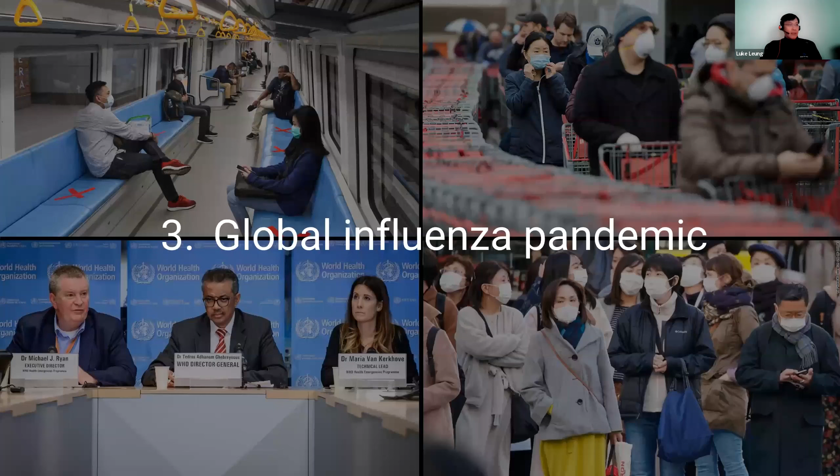So we are still in the middle of it, isn't it? Kind of the pandemic. So this is 2019, United Nations World Health Organization mentioned the top 10 things that can derail human society in the future. Pandemic, number 3. So what is worse than pandemic? Chronic diseases, non-communicable diseases, and number 1, climate change. So those are the top 3 things that's going to impact our health that can potentially derail humanity in the future.

On top of those 3 things, population. We are anticipating 2 billion people increase in the next 30 years. So by 2050, humanity will increase 25% more population. I mean, you really need to chew on that. A quarter more people on Earth. And not only that, by 2050, not like 2019, where people over 65 is only 9%, it's gonna be 16%, almost double the global population above 65 years old.

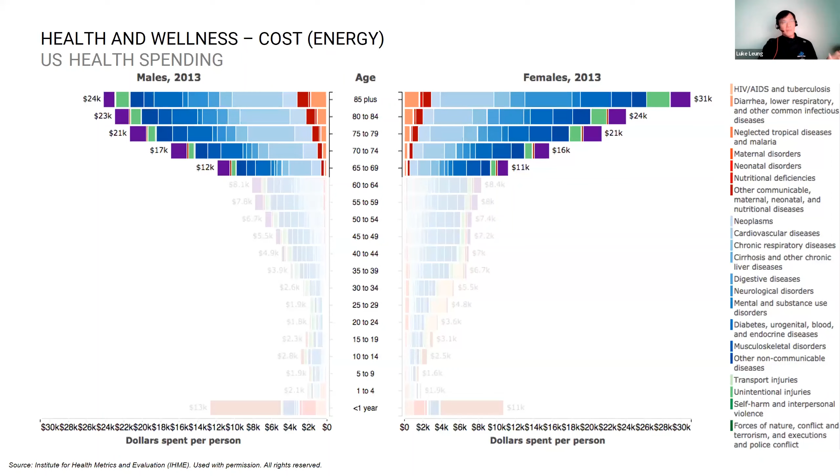Problem is when you're above 65, it just balloons the amount of healthcare costs. So you can see once you're above 65, it just mushrooms out the amount of illness you have, no matter male or female. Females on the right, male on the left. And the different shades of blue are chronic diseases, which is the second health impact that can derail humanity.

So let's march through these 3 elements for the rest of the hour to understand how we can do better. Climate change. We're going to have to move towards whole life carbon. Because by 2060, there will be 2.5 trillion more square feet of building because of the 2 billion more population. That is the entire building stock of the world. We need to double that. So there's a lot of area we're going to put in.

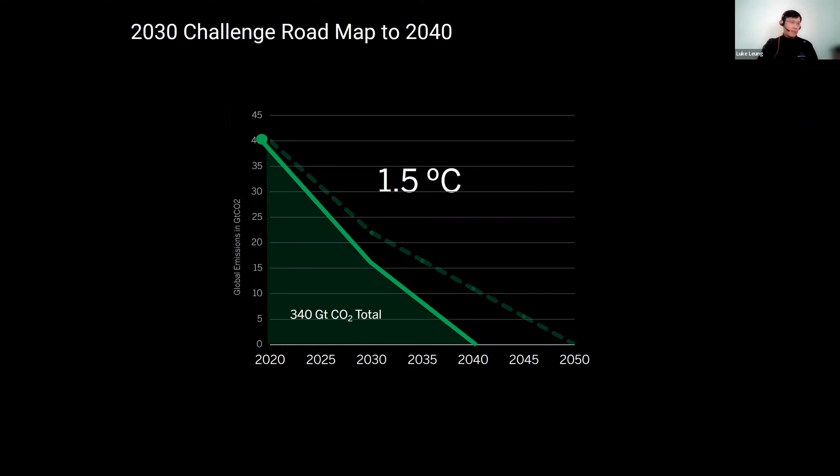And because of that, we have to maintain 1.5 degrees C by 2040, per the latest United Nations IPCC report, so the climate change doesn't get worse. And because of that amount of people, the amount of building, the carbon budget for that 1.5 degrees C is actually only 340 gigatons of CO2, not a lot.

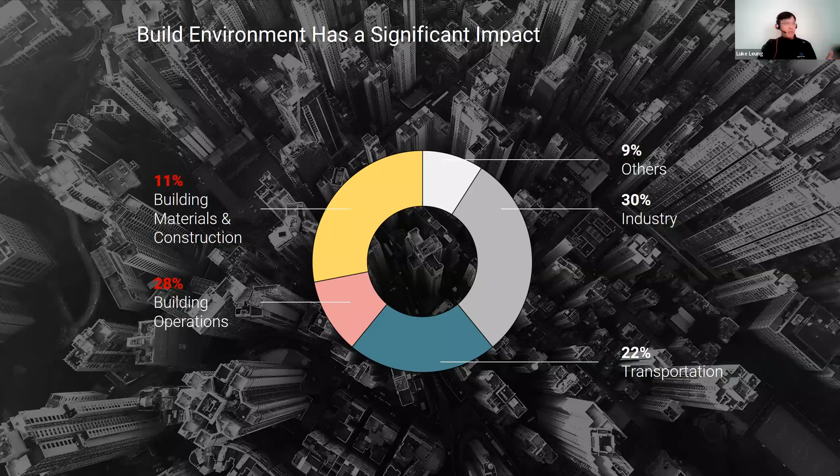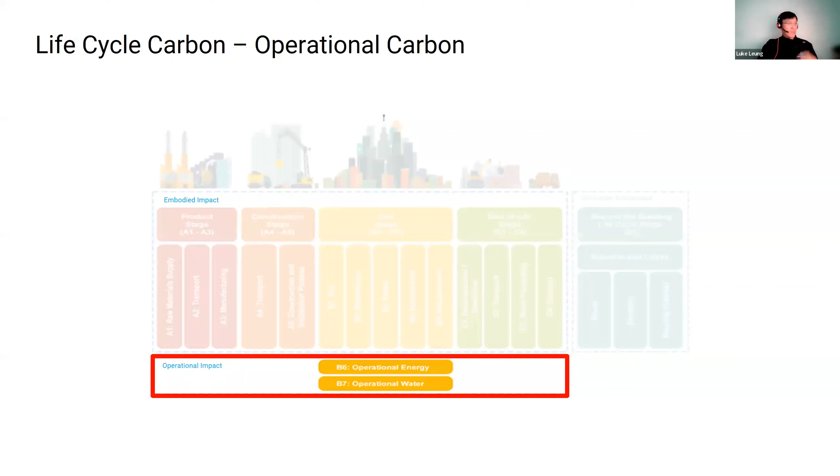And of course, by now you've probably seen it 1,000 times that buildings account for almost 40% of the carbon emission. Significant of them is in operation, about 11% in embodied. We know much better how to do operational carbon. Now, by the way, this is the framework of EN 15978. If you are not familiar with it, you probably should be, because a lot of organizations are already using this framework. And the operational carbon is really at B6 and B7 at the bottom part, the B6 and B7 categories.

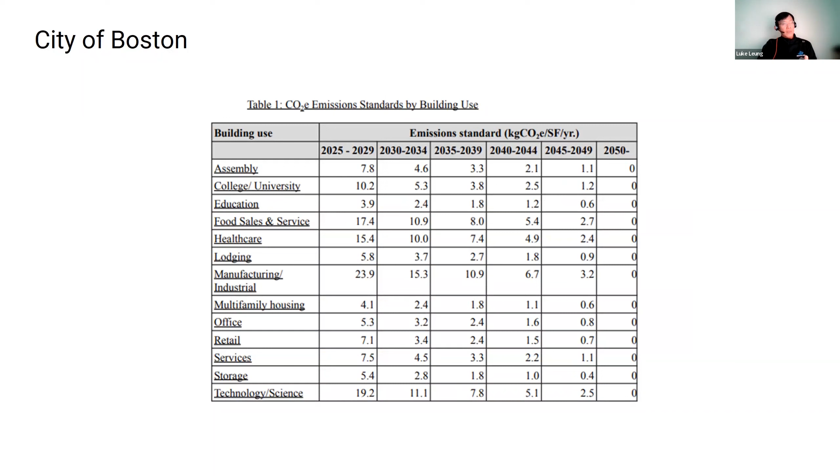We're going to see a lot more cities move forward, like City of Boston. They actually have not energy, but carbon emission standards for different types of building from now till 2050, which will be net zero. So I think we're going to see more of that. In the City of Chicago task force on building decarbonization, we actually have discussed information like that, of how to achieve a net zero future.

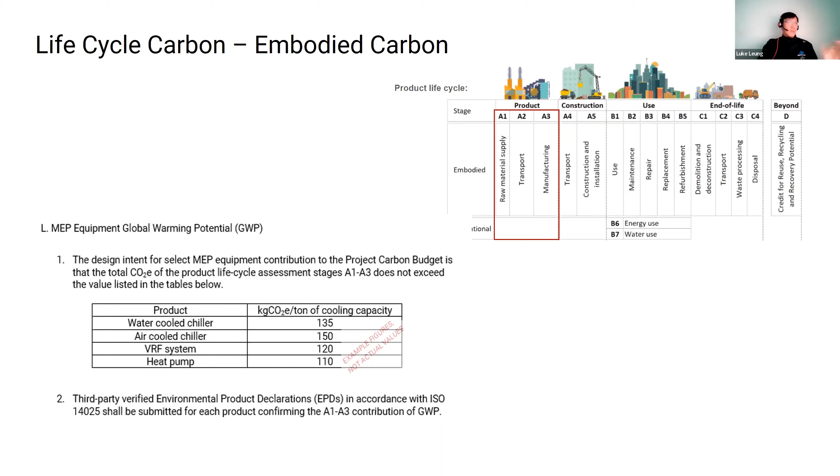And you probably heard a lot of discussion about A1 to A3, which is cradle to the gate of the factory building. There are many specifications that people start using that start asking for that information or specify the amount of carbon you can embody in those equipment, less in MEP, more so in structure, in architecture. So those are the product A1 to A3, the upfront carbon category.

And then A4 to A5, the transportation carbon to the site. That is a smaller portion, but people start also thinking about that. But more importantly is the in-use carbon. Now, why is the in-use carbon important? Because in this embodied carbon, it talks about the leakage of refrigerant, which has gotten a lot more attention because they're moving in several states.

They're moving to GWP of 750 or below. So in some states you cannot even use R410A or R134A. You have to use R32 or R513A, lower than GWP of 750, once you go over a certain amount of volume in the building. So that limits potentially what type of HVAC equipment you can use, because not all refrigerants can be used in all kinds of HVAC equipment.

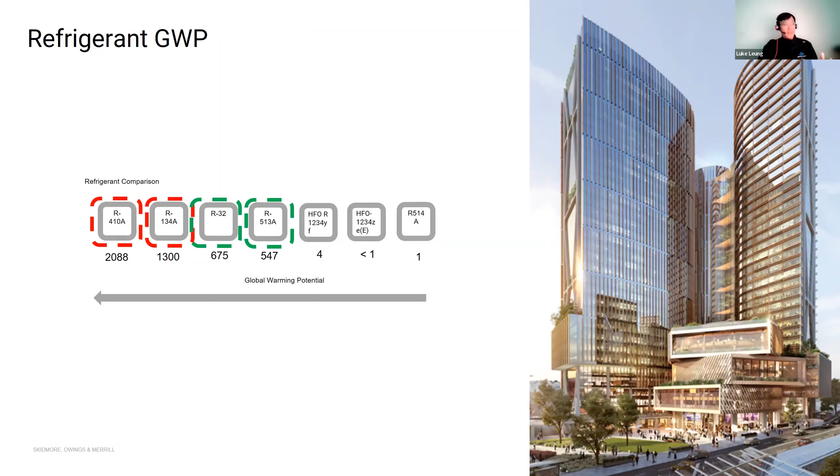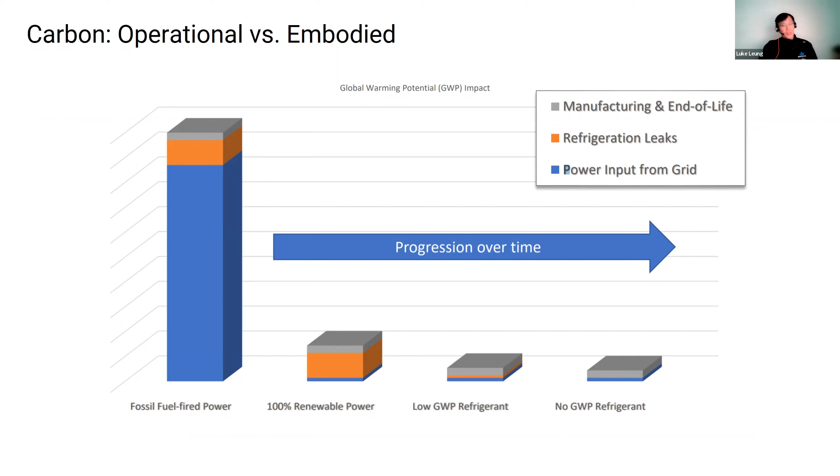In fact, as we go forward in time for any specific HVAC equipment, right now, much of it is the blue, the operational energy. But for those who use refrigerant in the future, once you get rid of the operational energy, the refrigerant leakage can be the next most significant carbon piece inside an equipment, and then the embodied carbon, which is gray in the picture here. Finally, is the end of life, how much of that you can recycle. So that makes up the embodied carbon.

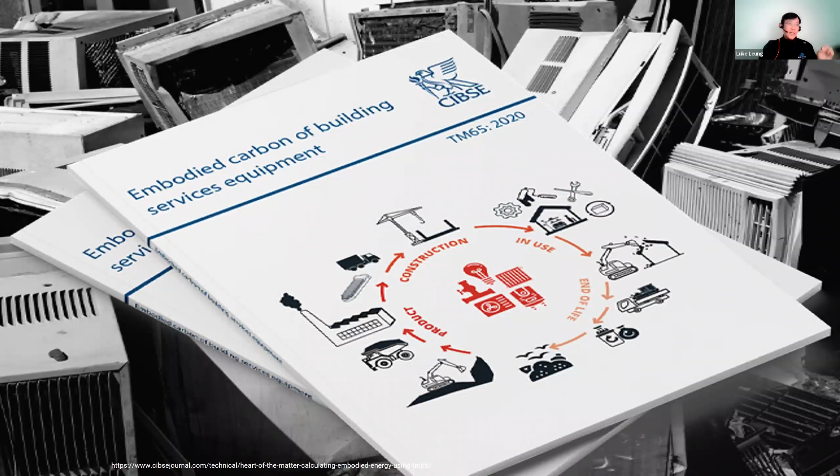Now, CIBSE people, as you know, UK already addressed this piece of embodied carbon in MEP. There's a standard in MEP embodied carbon, including refrigerant leakage as part of the embodied carbon. ASHRAE is right now thinking of using a similar standard, basically use TM65, but adopt it and make it a North America version so that the manufacturers can have a simple and less expensive way to provide embodied carbon information.

So that's life cycle carbon. So we quickly touched on carbon. So we're going to move into the next module. It's about kind of the pandemic. What is in the air?

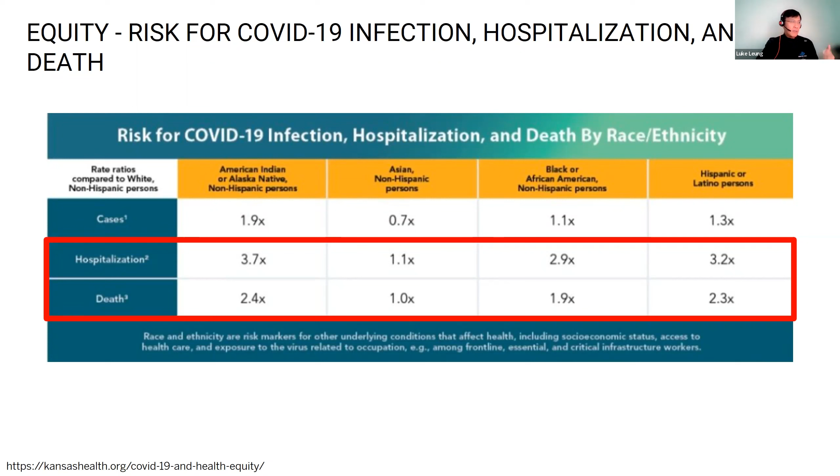So when we look at the pandemic, we see a whole bunch of things. We see not only the pandemic, but also it reflects the equity issue of much more hospitalization and death if you are minorities, right? Almost 4 times hospitalization, and death is almost about 2.5 times more if you are American Indian and other non-Hispanic minorities. And the other is not just race is an issue, but also if you are in senior living or school, you tend to have more outbreaks, especially senior living, which we'll touch on more later. A lot of outbreaks in there.

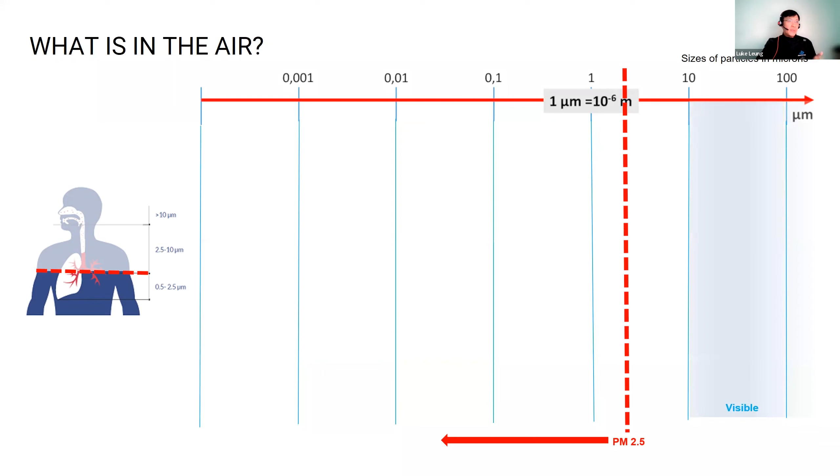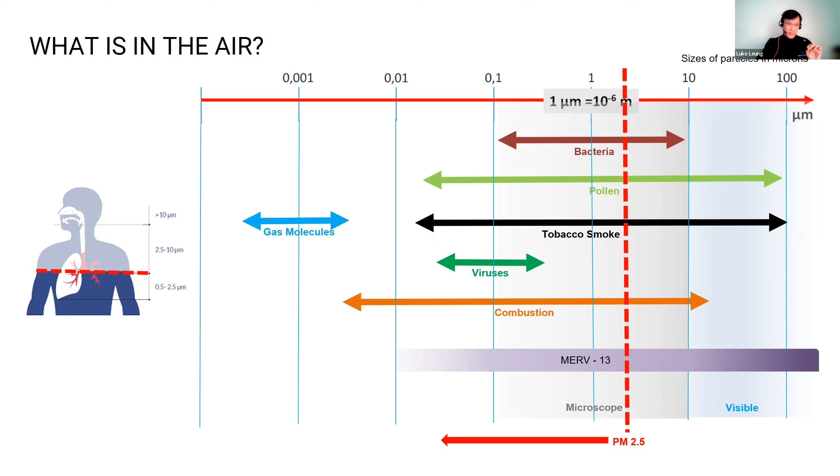So moving forward, in order to have a healthier world, we've got to start looking at the PM 2.5. And then those are the visible, those are the non-visible elements. But the good thing here is no matter if it's fire, pollen, bacteria, viruses, combustion material, a MERV-13 filter can take care of a lot of those, except if it's a gas, right? You have to use a carbon filter. So moving forward, ASHRAE and many organizations around the world are now thinking of using MERV-13 or equivalent to provide the necessary indoor air quality.

So one thing we can do is maybe we will spend more time outside, because when you are outside, your chance of breathing in any contaminants is about 1,000 times less compared to indoor. So this is 330 North Green. They're actually this space that can open to outside to create this half climate space.

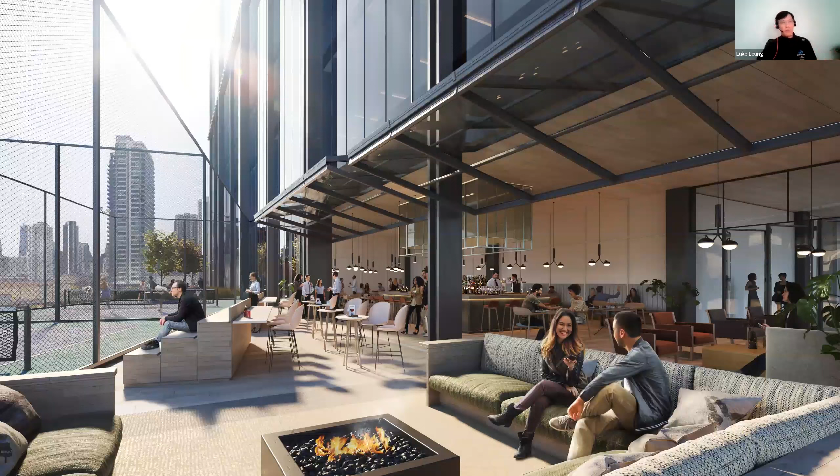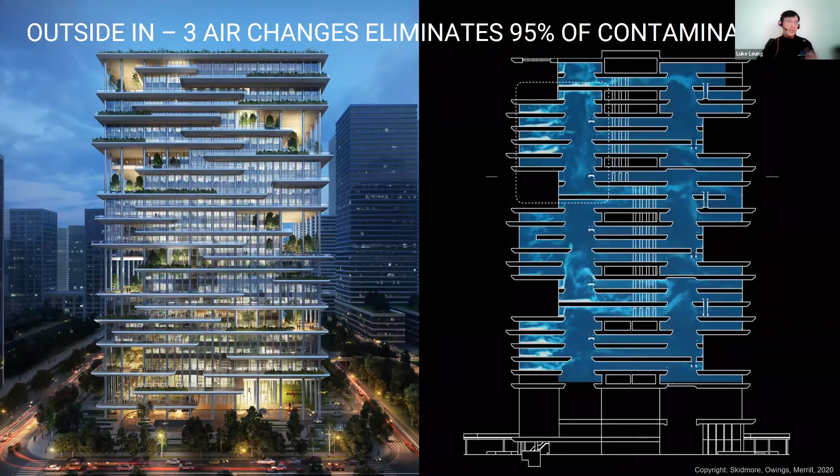ASHRAE is right now drafting an emerging issue brief on dynamic thermal environment. How do you design for this sort of half climate space? What are the issues to think about? Because when you open your window, or if you provide circulated indoor air, if you have three air changes, you can eliminate 95% of the contaminant inside the space. So provide clean air. Now, clean air doesn't have to come from outside, but it could be from the outside or from the inside. It can eliminate 95% of the contaminants.

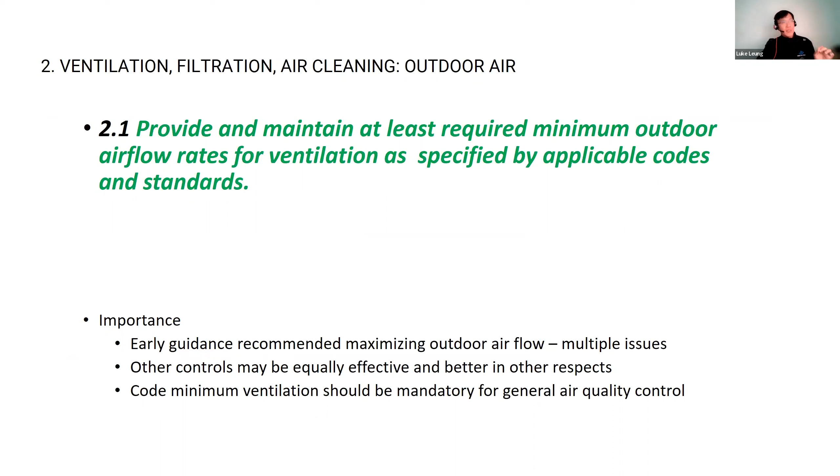But what about the times you cannot spend outside, in locations that are open to the outside? So the indoor environment is addressed in the pandemic by the core recommendations. Some of you are familiar with it. We'll quickly go over that. The first is to provide minimal outdoor air. You are not required to provide more outdoor air than minimum for pandemic purpose. So one of the reasons is because of this.

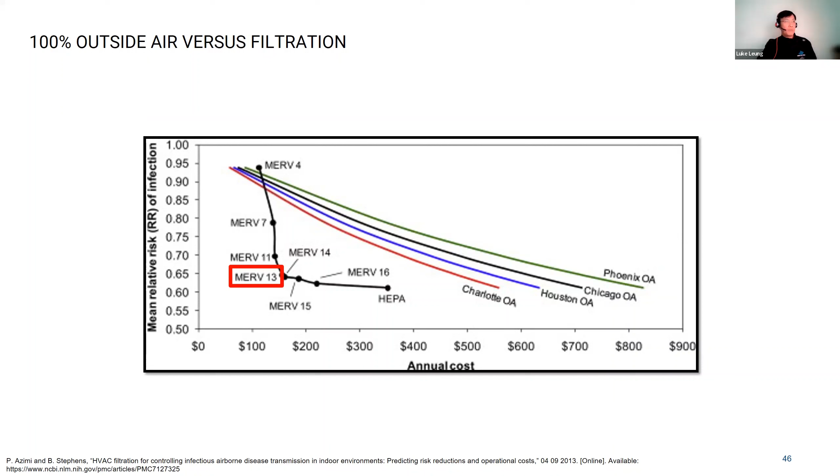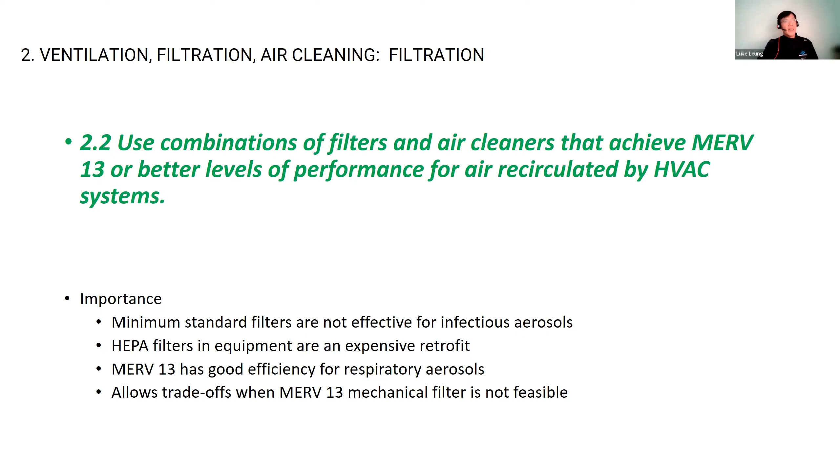Because if you have MERV-13, you turn the corner, 100% outside air only can eliminate just a little bit more risk, but you are paying a lot more if you are in Chicago, as you can see on the screen. So MERV-13 is a very good place to be. And the other thing to think about is a combination of MERV-13 filter or air cleaner or UV light. So the idea is MERV-13 filter at the AHU, portable air cleaners, or UV light. These three elements basically combine together to provide this MERV-13 or better level of performance.

Now, MERV-13 filter, a lot of people say, oh, it's going to cost you a lot more to run it, but you probably saw the ASHRAE Journal last year in about July or August. It actually talked about, compared to MERV-5, MERV-13 does not necessarily increase the amount of pressure drop. But you got to be careful, because if it's a 1-inch MERV-13 filter, oftentimes it's pre-charged with electricity. So it may be more efficient initially. As time goes by, the charge kind of drops, and then the efficiency will drop too. So the 1-inch MERV-13 filter, you just have to be mindful of that.

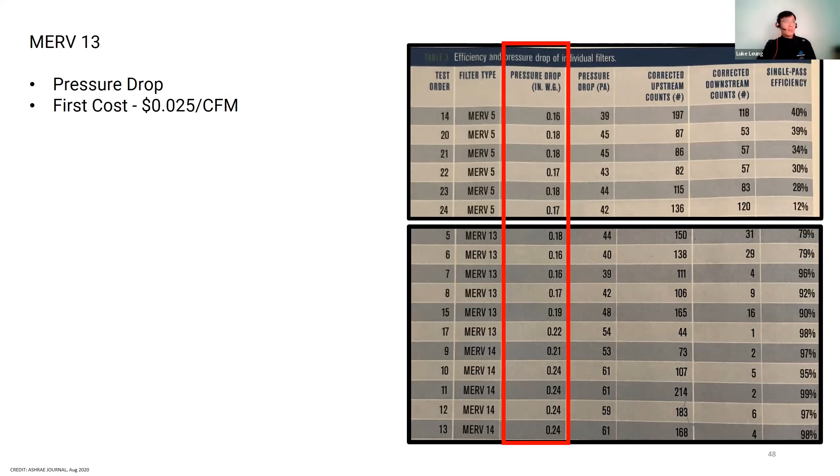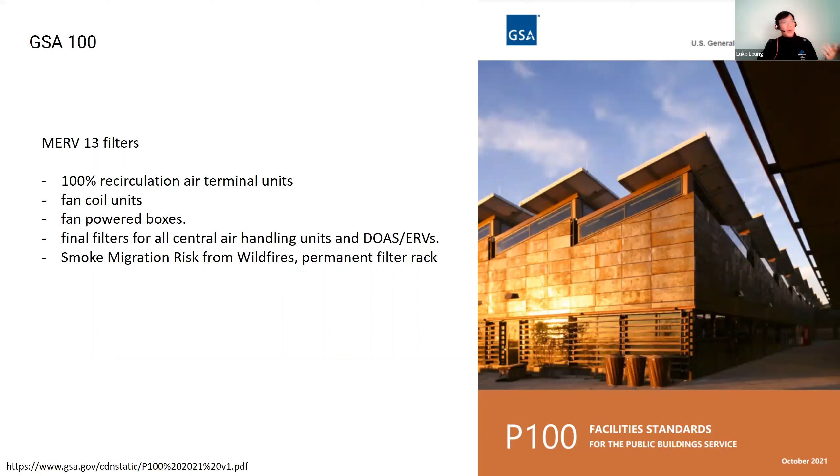Well, who's doing that? If you work with GSA P100, the latest edition already recommends MERV-13 filter in all the AHUs, different types of MERV-13 filter. It will be more like a bag filter for AHU, but more like a 1-inch filter for fan coil, and you will have to add filter to fan coil, fan powered boxes. All the recirculation elements need to have MERV-13 filter. And it's also a provision for areas like California, which will see wildfire.

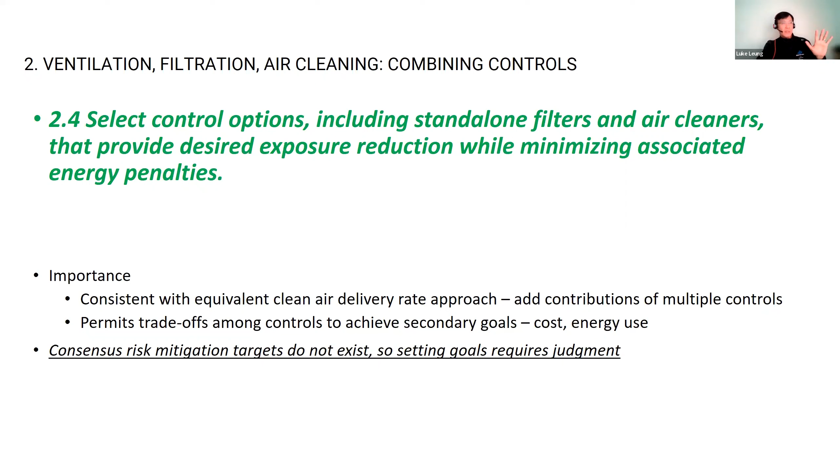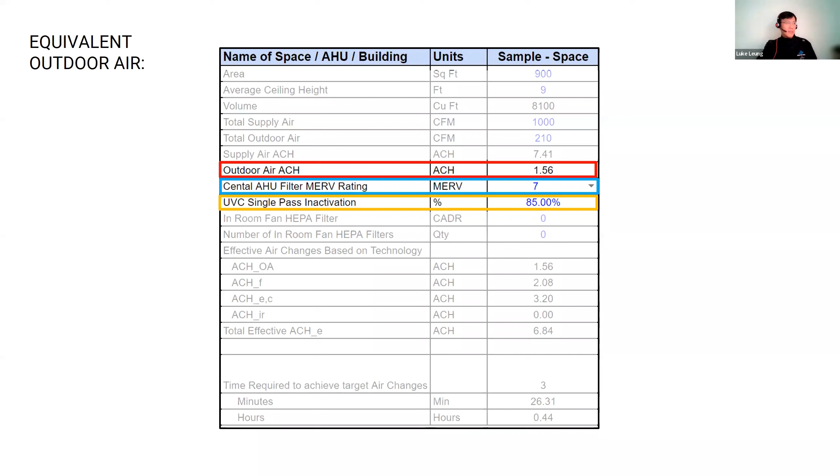Now, when you mix MERV-13, portable air cleaner, and UV light together, you can potentially have higher level of protection than just basic MERV-13, right? So depending on what your space requirement is, you can potentially add these devices in different configurations to improve your protection. You probably heard of the equivalent outdoor air approach, which allows you to add, quote unquote, equivalent outdoor air together. So if you have outdoor air, you have MERV-7, you have UVC light, these three elements, you can actually add them together. In this case, it forms about 6.84 of equivalent outdoor air. So this approach is on the ASHRAE website. You can download it and use it.

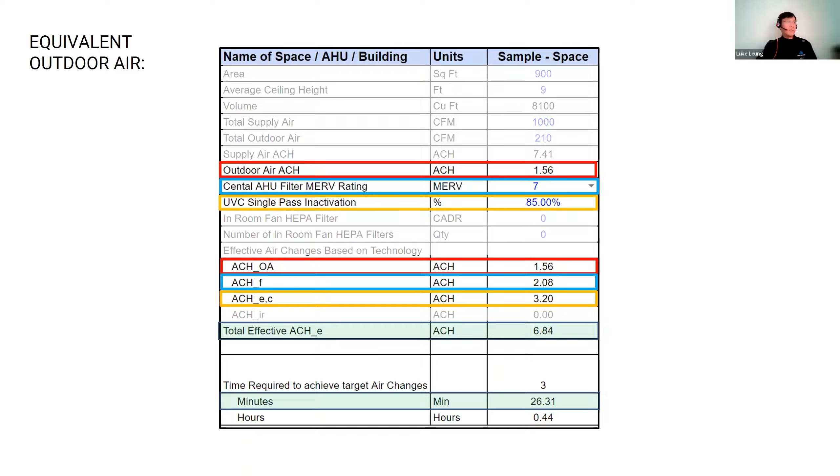Another concern we saw during COVID time is a VRF system, the cassette with no filter, right? So when you start recirculating the air with no filter, that's what happened in a Guangzhou restaurant. It ended up with a lot of people getting infected beyond the distance of 2 meters, right? This is the famous case. So moving forward, what we think will be important is if you're going to have a VRF cassette inside a space with no filter, you may want to start thinking about provision of certain air cleaners in the space that achieve that MERV-13 rating when it's required during pandemic time.

So how do we design our buildings, especially for the senior citizens who saw a huge amount of outbreaks in their senior living, as some of these buildings have VRF cassettes. So we got to start planning for how do we achieve that MERV-13 or above filtration holistically. Now, what if you have Omicron or other viruses that are much more infectious than the current one? So this is what happened.

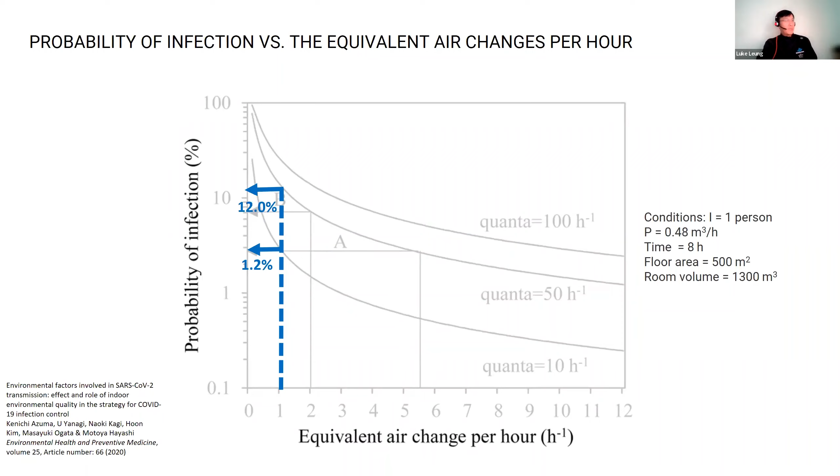Okay, so pandemic. Before we move forward, the key there is provide a MERV 13 filter or equivalent or more, depending on the risk of the space, right? So chronic diseases, what's happening to the human race?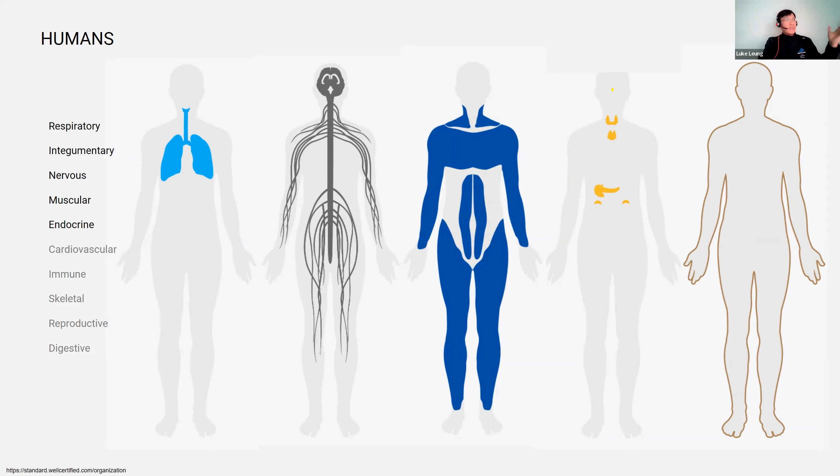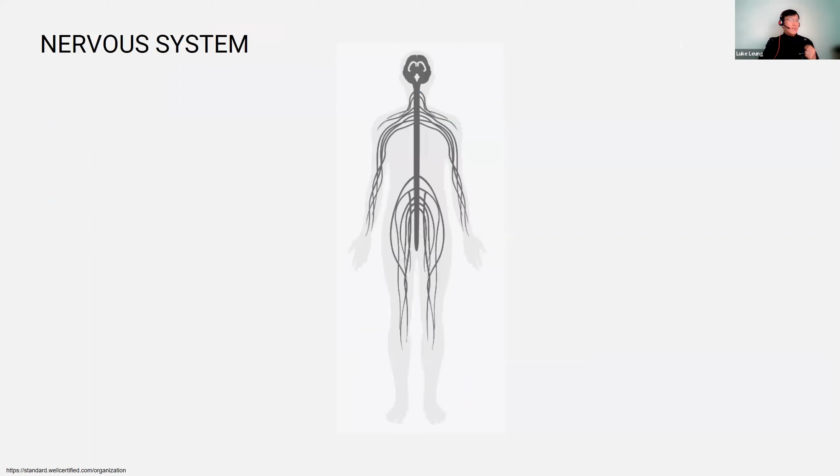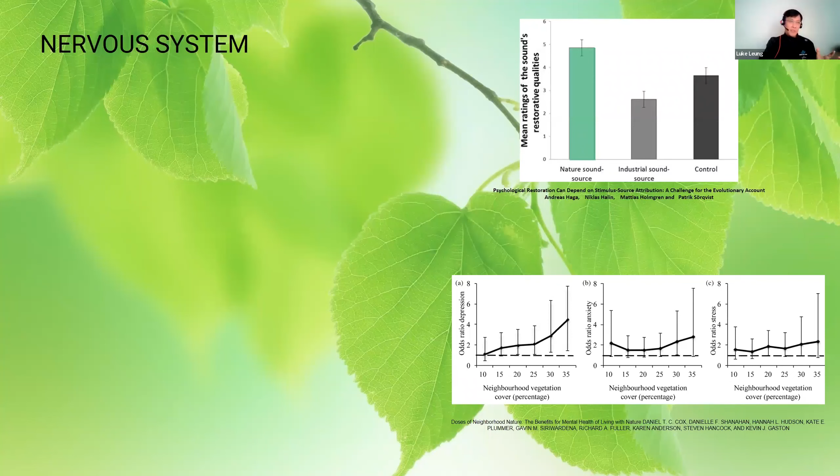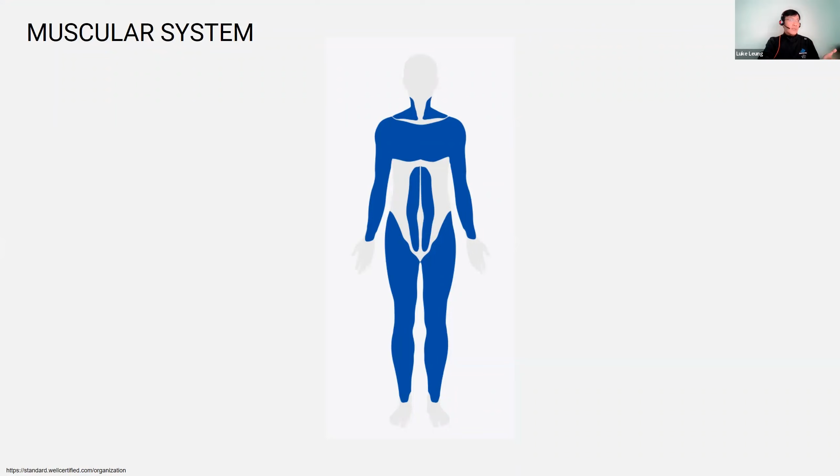But there's also the muscular system, as in we need to walk 7,000 steps a day. We see design towards more expressing of the stairwell and use of the stairwell in buildings.

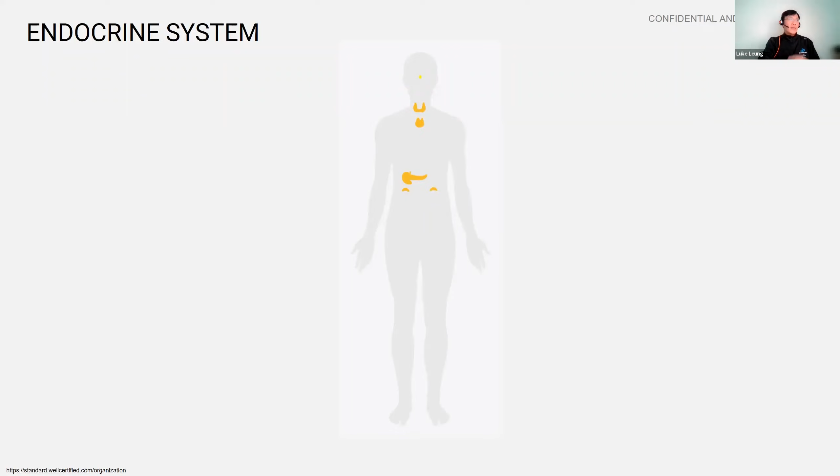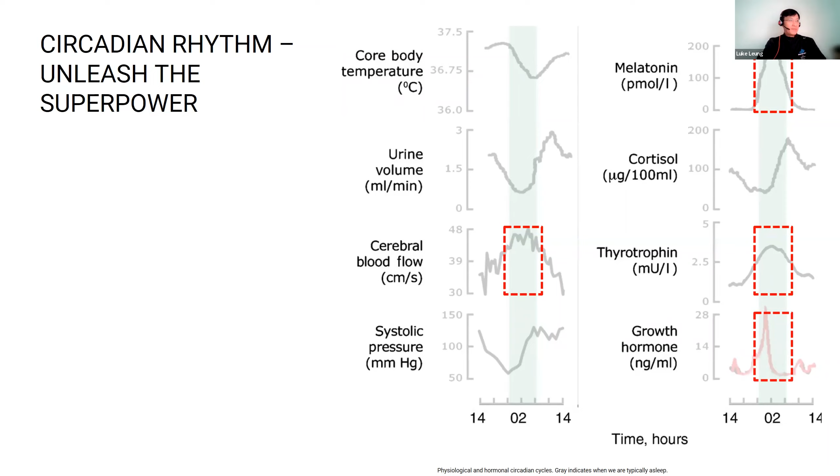And then the hormone system, addressing the circadian cycle, because there's actually more blood flow to your brain when you're sleeping than when you are awake. So oftentimes your best ideas come up when you just wake up, because plenty of blood flows to your brain when you're sleeping. So to address this circadian rhythm, we start addressing the lighting of the building in terms of not using white and blue light in the nighttime, etc.

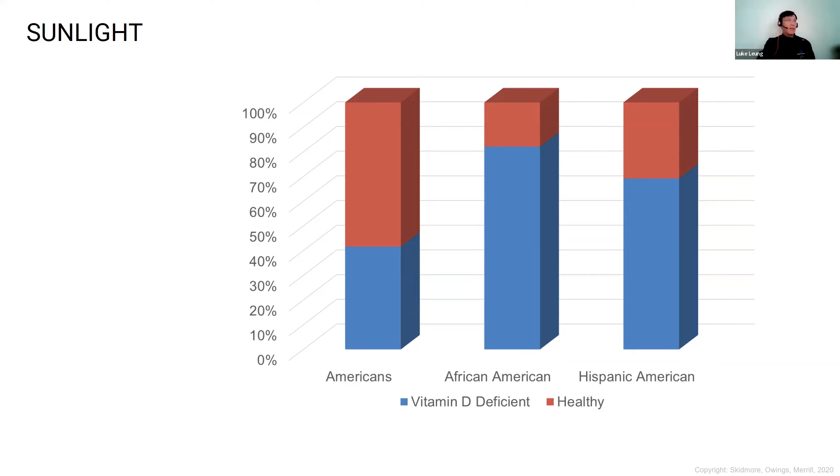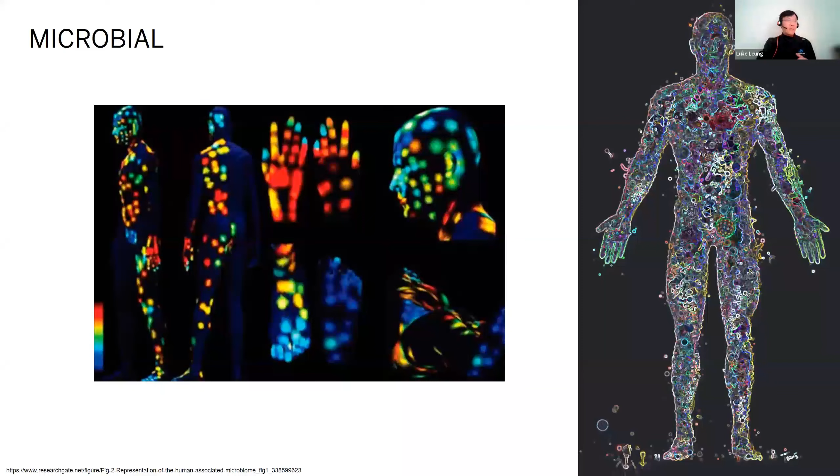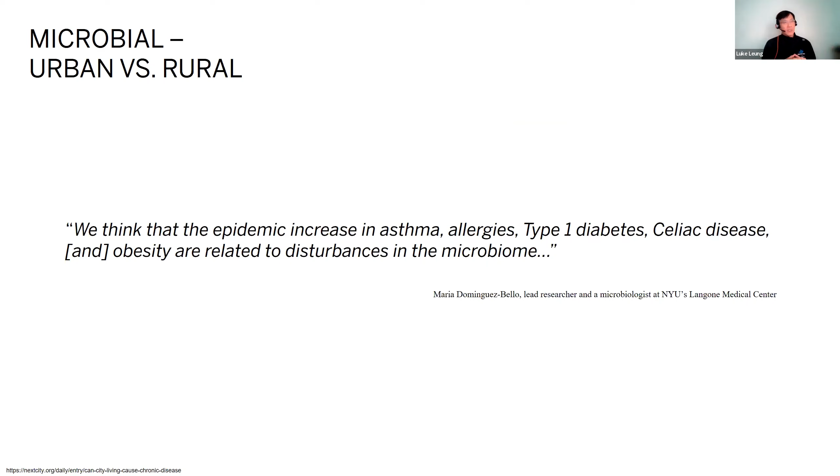Also impacting our skin is microbials. Studying rural and urban areas, New York University researchers found the microbial makeup of the urban environment is very different than the rural environment. And they came to the conclusion that part of the reason why there are so many chronic diseases in this generation is because we disturb the microbial biome in our built environment.

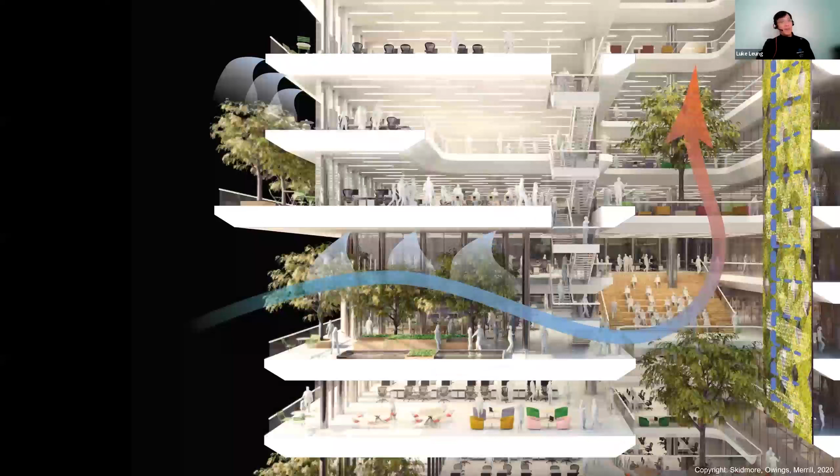Now, you've probably been seeing some discussion of probiotic air, or probiotic food, right? They hold some promise, but a lot more research needs to be done to understand what probiotic air will be healthy for everybody. In the meantime, a dose of natural ventilation may also be helpful. In this case here, we planted trees outside the building to bring a little bit of that diverse microbiome inside the building.

So finally, we addressed three things already: the climate change, pandemic, and also the chronic diseases, right? The change in human body. Finally, I want to add a little bit of that Midwest twist here.

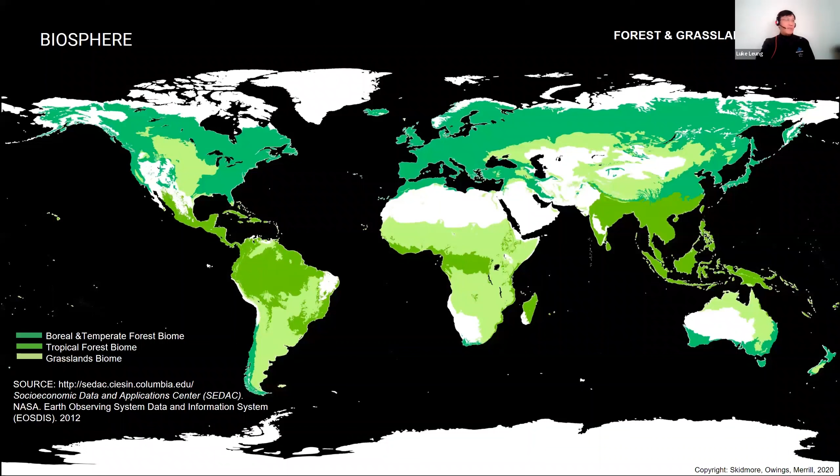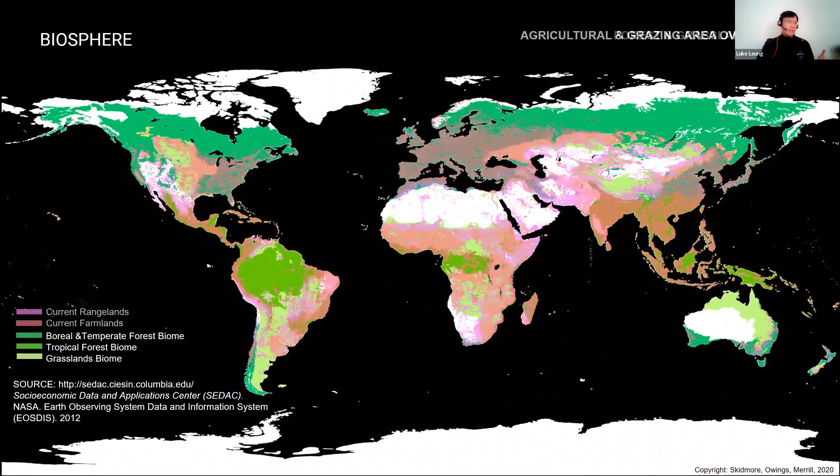When we look at the world 8,000 years BC, it looks like this. This is the world today. It's not the urban area, it's the farming area that impacts the green area. We took down a lot of the forest to create this farming area. And we are from Illinois, a lot of us are, so we know what that means.

Now, when that happened, actually the world as a whole, this is a paper done by MIT, decreased the amount of biogenic secondary organic aerosol. Basically, a lot of this microbial from plants decreased. Now remember that diversity of microbial is important, right? We actually decreased that diversity. What increases is the nitrogen oxide from the soil released into the atmosphere, and the ozone increases. So the air we breathe compared to pre-industrial revolution is probably not as healthy.

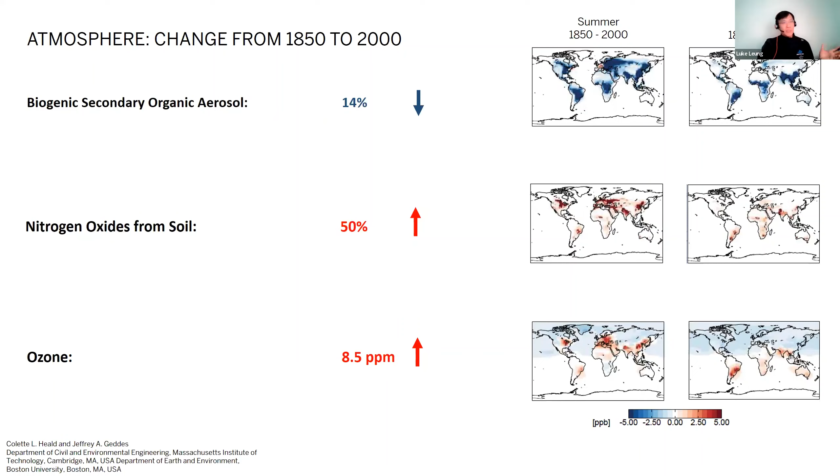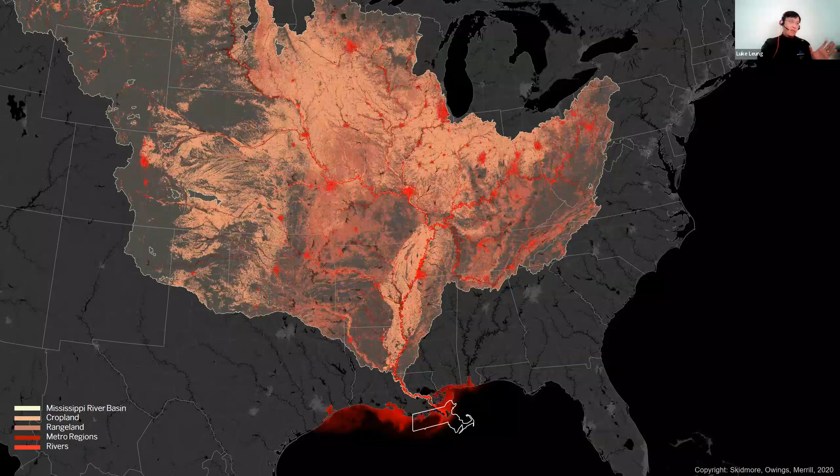And also the soil we live in, since we are in the Midwest, there's a huge amount of this runoff to the Gulf of Mexico to form the dead zone. The dead zone is, if you take one of the states in the US and put it there, it's significantly larger than that. It's the nitrogen and phosphate runoff from the farming in the Midwest area that creates this dead zone in the Gulf of Mexico.

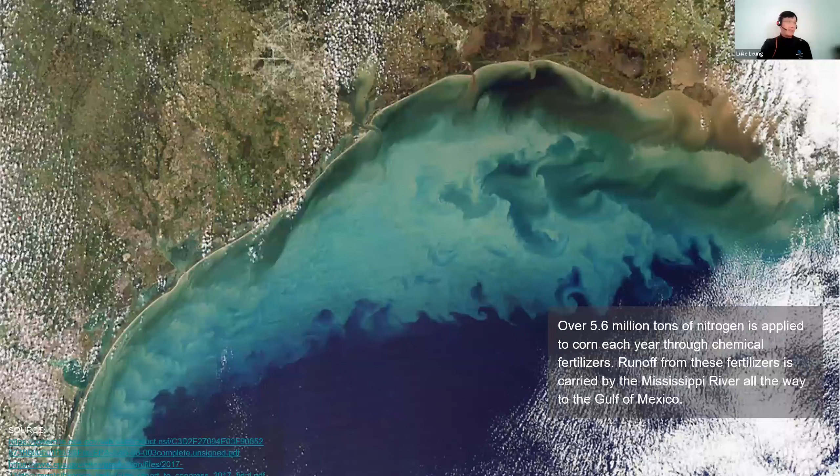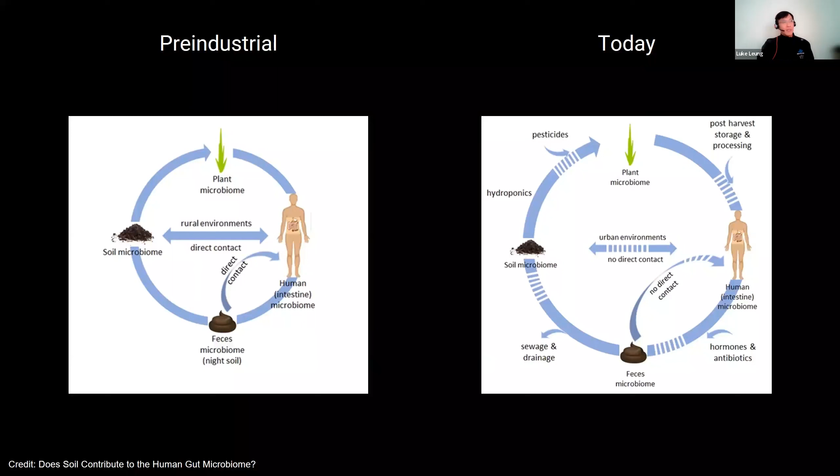That element flows into the Gulf of Mexico and also flows into our tummy. Sorry about that, I know it's lunchtime, but it's a little different than pre-industrial revolution. Pre-industrial revolution, that was a cycle, so what goes into our tummy tended to be more diverse microbes. Today, with the pesticides, with the different way we treat our waste, and the post-harvest treatment of food, etc., we broke down that microbial cycle. So it's no surprise today that inside our guts, the microbes are completely different than the pre-industrial people.

Well, how do we know the pre-industrial people? How did their gut microbes look? So what we did is we studied the Amish people to figure out how the gut microbes are different. Now maybe the haircut also helped, but other than the haircut, the Amish people are significantly healthier than typical Americans. Part of that is the gut microbe.

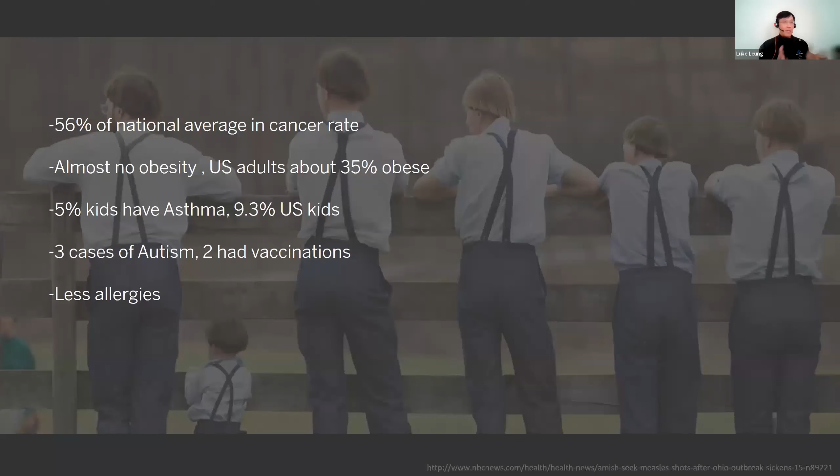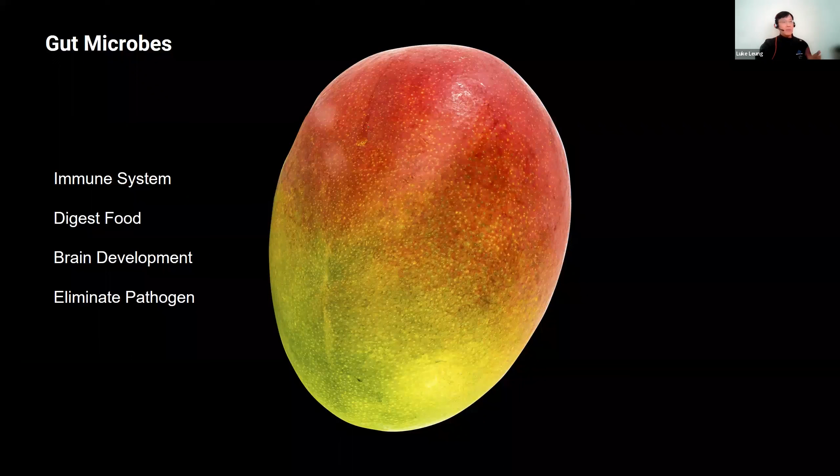How do we know that? Because the gut microbes, add all of that together, are about the size of a mango, but they also help develop your immune system, digest your food, your brain development, and eliminate pathogens inside our body. So if the gut microbe changes, you as a person also change. Just like what University of Oxford told us, the gut microbe is actually linked to your personality.

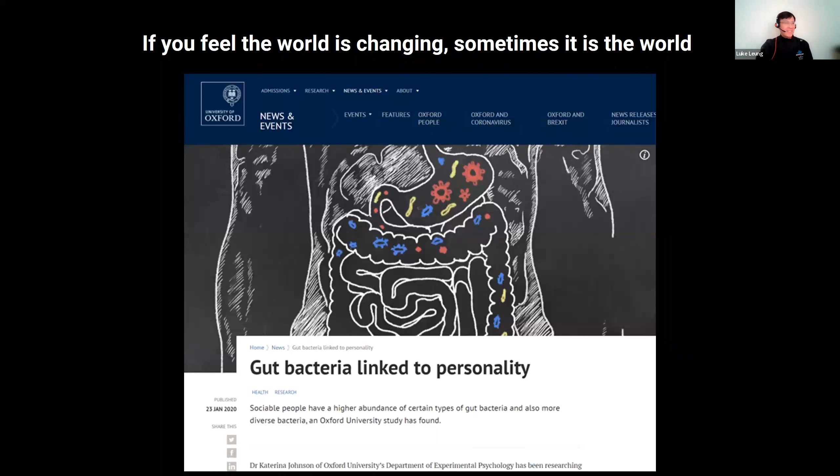So sometimes you think, oh, maybe the world is changing. Oftentimes it's maybe not the world, it's you, but other times it's actually the world. So if you think the person next to you is acting a little bit strange, you may want to ask them, what did you eat yesterday? Because this research indicates your gut microbe can potentially develop a whole bunch of chronic diseases, from asthma to cardiovascular to type 2 diabetes. It has that impact, not just the food you eat, but how the gut microbes digest the food you eat.

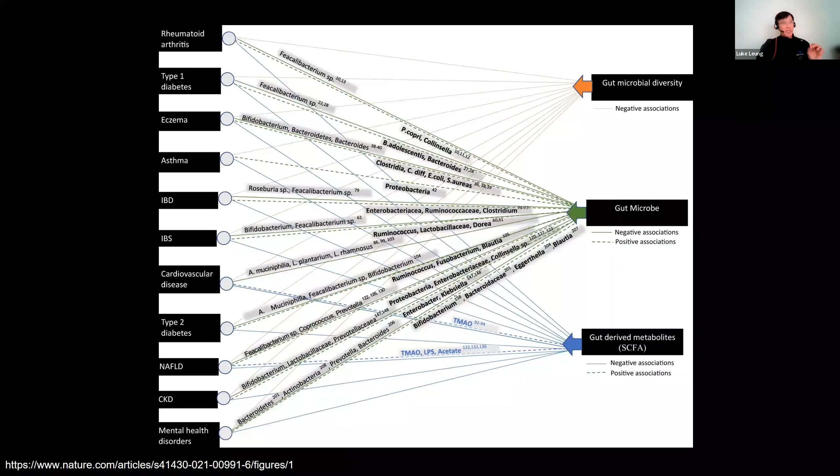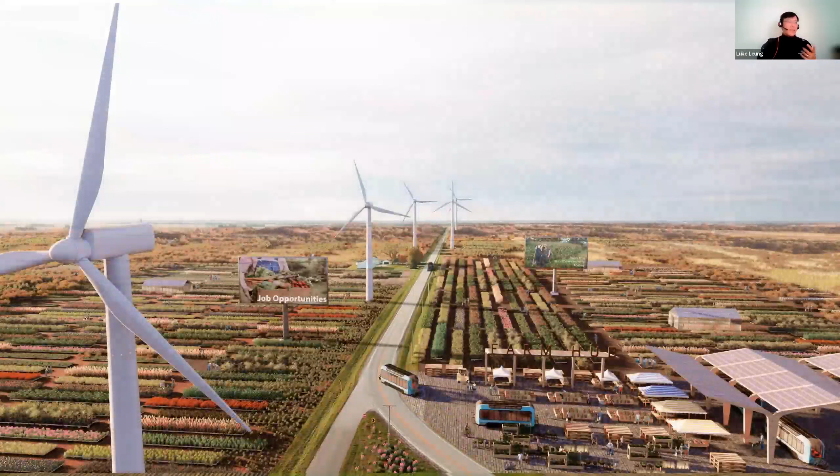So oftentimes, as we think about bio-based material, we're going to say, oh, let's try to lower the whole life carbon. Let's use bio-based material. Well, unless the bio-based material comes from regenerative farms, it can potentially do more damage and release more carbon than other materials.

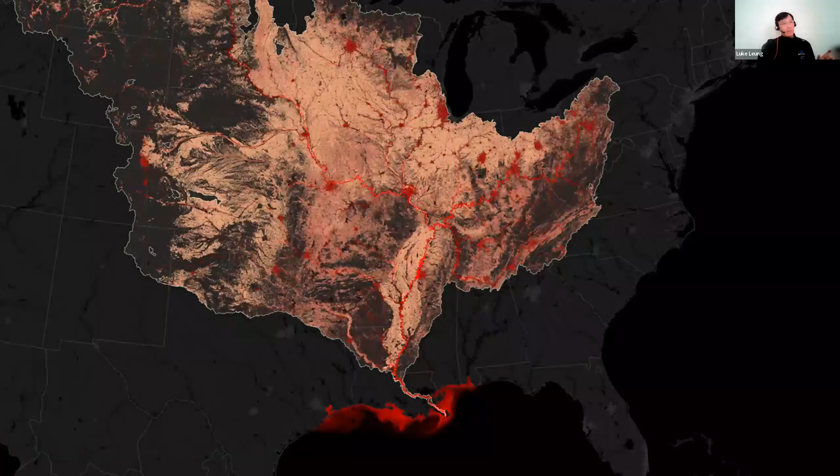So we have to be really careful when we start specifying bio-based material, especially since we are from the Midwest. If we can specify and start thinking about regenerative farms, we can potentially change the runoff to the Gulf of Mexico to no runoff, make the environment healthier and people healthier.

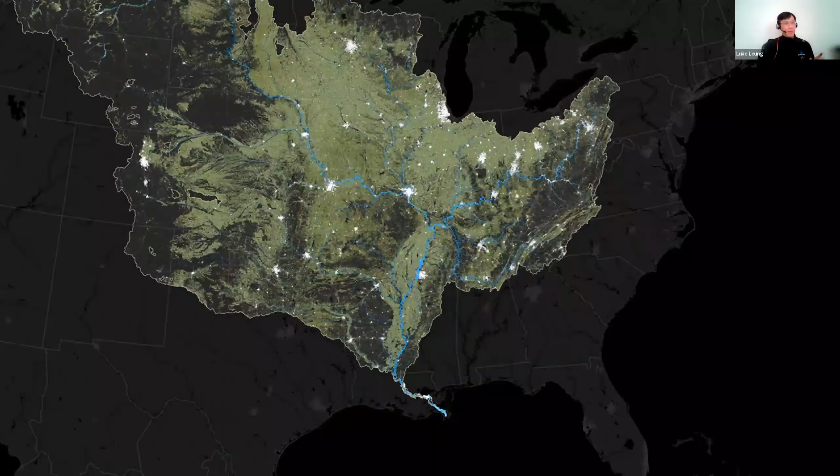So what did we cover today quickly in less than 40 minutes? First, we looked at the 3 elements that are going to derail humans in terms of health, and we addressed them, starting from climate change, then post-pandemic buildings and what needs to be done, then chronic diseases, and finally, how, as people who live in the Midwest, we can potentially address an ecosystem issue that can help create not only a healthier environment, but healthier human beings in the Midwest.